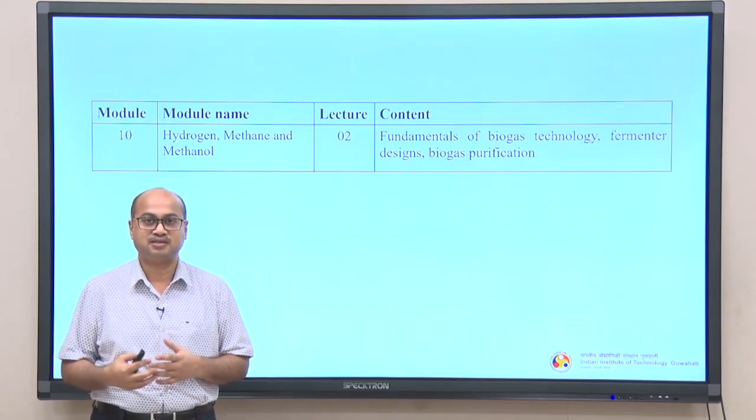Fundamentals of the biogas process. Biogas is an energy rich gas mixture that is created during the natural decomposition of organic material without the presence of air, or precisely, oxygen. The major and important component of biogas is the combustible methane.

Depending on the substrates used, methane content varies between 50% to 65%. In addition, there is also carbon dioxide with a proportion of almost 35 to 50%, the second major component after methane. Apart from carbon dioxide, there are other ingredients present in very minuscule quantity, such as nitrogen, water, oxygen and hydrogen sulphide.

Especially hydrogen sulphide creates a lot of problems, but it is present in low concentrations. However, for certain applications you need to scrub it.

Now, biogas can be converted into electricity, heat, gas or fuel. What remains with the fermentation product is a high quality fertilizer. That means after the gas is produced, whatever is left out is the solid residue, which is actually a good quality fertilizer, very rich in humus forming substances and nutrients.

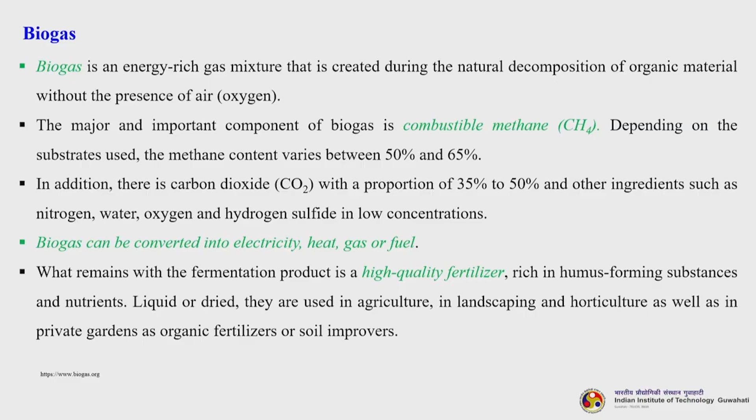Liquid or dried, they are used in agriculture, in landscaping and horticulture, as well as in private gardens as organic fertilizers or soil improvers or soil enhancers.

Natural gas consists of 98% methane. Now, in order to feed biogas into a natural gas network, it must have the same methane content as natural gas, that means 98%. For this purpose, biogas is washed and the carbon dioxide is removed, so that the methane content increases.

Now, if biogas has a methane content of 98%, it is called biomethane. You must have heard about biomethane many times. Many people get confused about the difference between biogas and biomethane. So essentially, if biogas contains 98% methane, we can call it biomethane.

Now this can be fed into the existing gas network, and for example, taken from the pump of a gas filling station. A biomethane vehicle reduces carbon dioxide emissions by up to 90% compared to a comparable petrol engine, and costs the user only half of the fuel cost per kilometer.

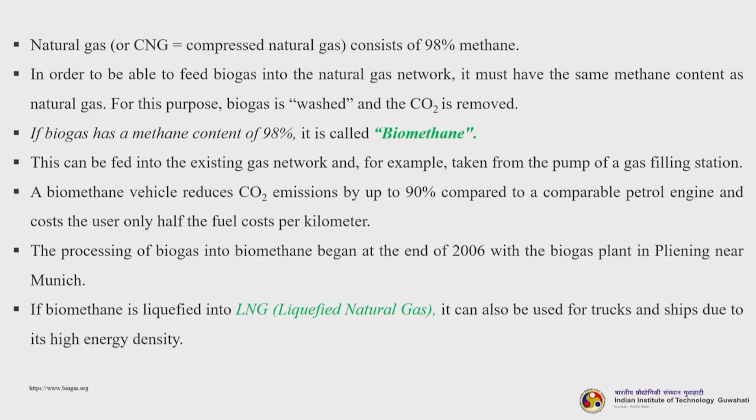The processing of biogas into biomethane began at the end of 2006 with the biogas plant near Munich in Germany. So if biomethane is liquefied into liquefied natural gas, that is LNG, it can also be used for trucks and ships due to its high energy density.

Now we will try to understand the characterization of the substrates, that is, what type of characterization they require, as these are basically the feedstocks for the biogas plants. So the term substrate refers to any biomass suitable as an input material or feedstock for the biogas plants.

Not all the constituents of the substrates are biodegradable in an anaerobic fermenter. Most of the biomass consists of water, and minerals form another fraction of the biomass. So although all organic matter is considered biodegradable, the reaction velocities of degradation of various organic compounds differ considerably.

The substrate may contain easily biodegradable material like sugar, starch, alcohols and so on, then medium biodegradable materials such as protein, cellulose, fats, oils and so on, and then heavily biodegradable materials like lignocellulose and lignin. Both of these decompose very slowly, and sometimes not at all, and therefore the retention time inside the fermenter becomes very long due to the slow decomposition of these components.

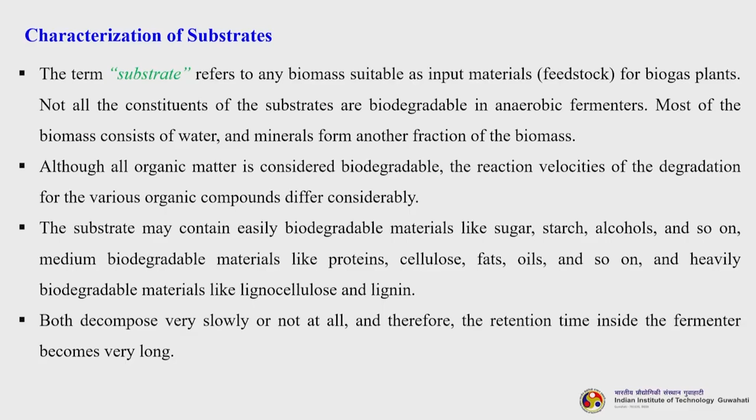How to characterize the composition? First, a defined amount of substrate should be dried at 105 degree centigrade until the mass remains constant. So I am just trying to explain the procedure to characterize the substrates.

Mainly water will be lost, but also some substances such as alcohols, aldehydes, ketones, carboxylic acids, etc., all organic components having low vapor pressure, will disappear. Now this residue is called total solid or dry matter. So you can write either TS, which is more appropriate, or many times people write dry matter also.

After ashing for 6 hours at 550 degrees centigrade, only the minerals will remain. It is assumed that the difference between the mass of the total solid and the mass of the ash, so to speak, the loss on ignition, is the mass of the organic dry matter that was decomposed thermally or burned down. Sometimes this organic dry matter is also called the volatile substances, VS, or volatile dry matter.

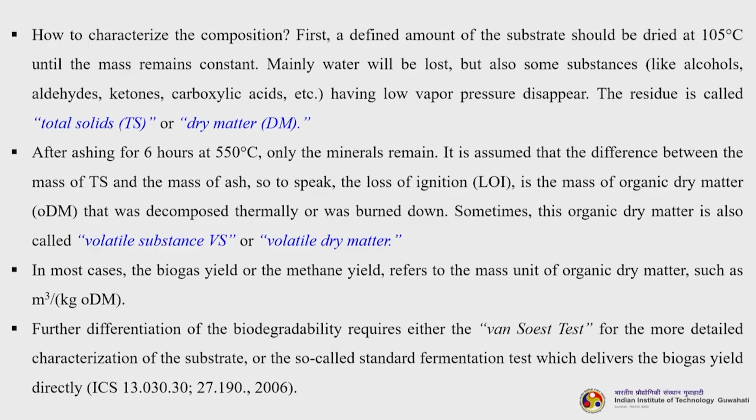In most cases, the biogas yield or methane yield refers to the mass unit of organic dry matter, such as meter cube per kg of ODM, where ODM is organic dry matter. Further differentiation of the biodegradability requires either the Van Soest test for more detailed characterization of the substrate, or the so-called standard fermentation test, which delivers the biogas yield directly.

For the metabolism of the microorganisms, macronutrients like nitrogen, phosphorus, potassium, sulfur, as well as certain micronutrients such as trace elements of chromium, cobalt, selenium, tungsten, magnesium, iron, zinc, nickel, molybdenum and so on are utmost necessary.

A ratio of C to N to P to S of 500 to 1000 is to 15 to 20 is to 5 is to 3 is usually sufficient. The balanced composition can be obtained by adding raw straw if the C to N ratio is too low, or by adding manure if this ratio is too high.

So we are learning how to prepare the feedstock material and charge the fermenter so that anaerobic digestion can proceed. A mixture of trace elements needs to be added only in the case of monofermentation of biogas crops, while in the case of co-fermentation of plants and manure, an addition of trace elements is usually not necessary.

It should be pointed out that high concentrations of nutrients as well as trace elements could have an adverse, even toxic effect on the metabolism of the microorganisms responsible for producing biogas. Despite all progress in research, the role of the trace element has not been discovered completely yet, especially for new substrates. The necessity of adding nutrients and trace elements should be analyzed experimentally.

Now, this is a very interesting slide, for which I have given a reference here—you can download and read it later. In a single schematic representation, the authors have tried to make us understand the different types of characterization processes and at what temperature each will be carried out.

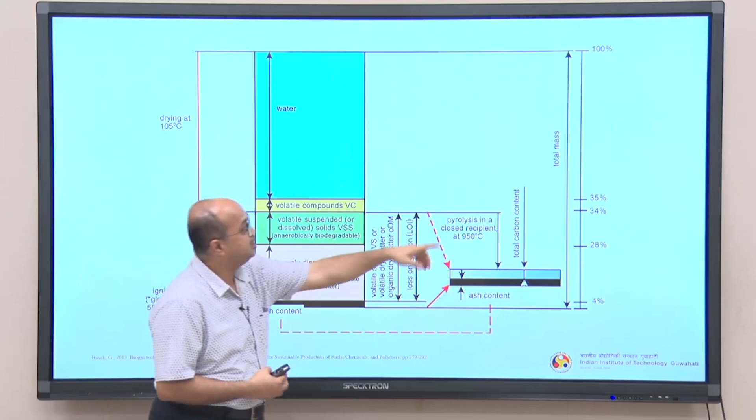If you see this, the temperature is increasing in this direction, and the total mass is 100%, getting decreased in this direction. The most of the portion is almost 34 to 35%—this entire rest here is 35—so the remaining 65% is the water loss, or the moisture loss, due to bound and unbound moisture.

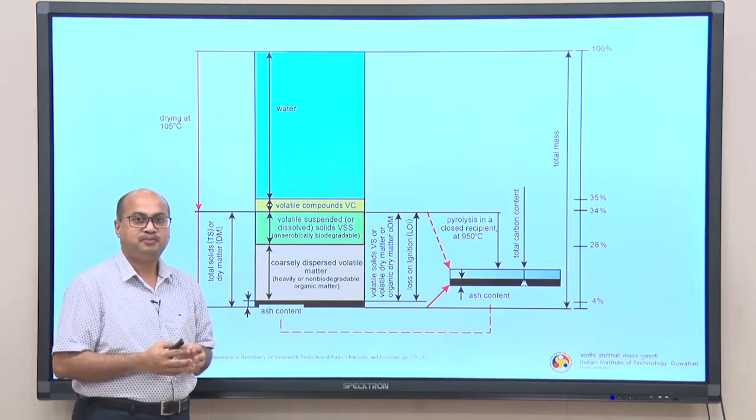Then ash content, which is usually 0 to 4%, depending upon the biomass feedstock. Again, ash content can be determined using pyrolysis in a closed recipient at 950 degrees centigrade. So you can understand, in a single slide, the different characterization techniques that can be done with respect to thermal decomposition.

Now we will try to understand the basic processes and process conditions essential for biogas fermentation. The decomposition of the substrate and the formation of biogas involve at least 4 distinct steps. We will see them one by one.

The first is the decomposition of solid organic matter by extracellular enzymatic reactions into water-soluble chemical compounds. This is called hydrolysis, the most important step of the biogas process. This hydrolysis by fermentative bacteria is the conversion of polymers into monomers and brings about a wide variety of substances like glycerol, sugar, amino acids, alcohol, aldehydes, ketones, esters, higher carboxylic acids and so on.

In the second step, these substances are converted by acidogenic bacteria into carboxylic acids such as propionic acid, butyric acid, acetic acid, valeric acid, caproic acid and so on. Simultaneously, hydrogen and carbon dioxide are produced as byproducts, but at a very low amount.

The third step is that acetogenic bacteria convert the carboxylic acid into acetic acid. In the fourth and final step, methanogenesis, methanogenic bacteria produce biogas from acetic acid as well as from molecular hydrogen and carbon dioxide. The latter conversion seems to be much more important than previously assumed.

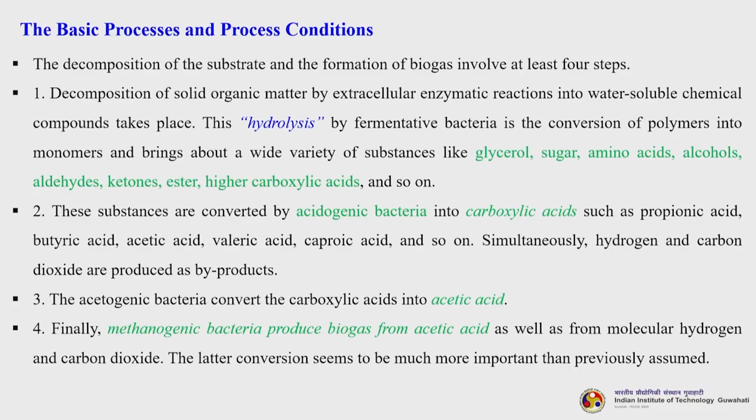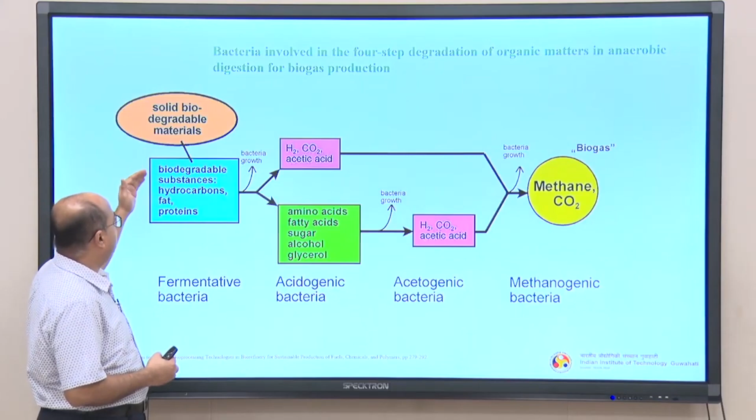This slide shows the different types of bacteria involved in the four distinct steps. We will quickly go through them. The first is the fermentative bacteria. Here, solid biodegradable materials such as hydrocarbons, fat, and proteins are converted to monomers - this is the hydrolysis step.

These steps happen in sequence, but once they start, they are all happening simultaneously. Then we have acidogenic bacteria, which carry out acidogenesis. Here amino acids, fatty acids, sugar, alcohol, and glycerol are converted into different types of acids like carboxylic acids. Also, a little amount of molecular hydrogen, carbon dioxide, and a little acetic acid are formed during this process.

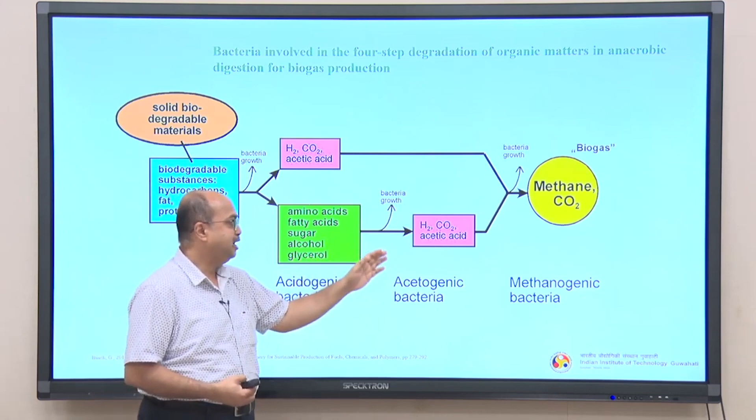Now we go to the methanogenesis process, where methanogenic bacteria convert acetic acid, molecular hydrogen, and carbon dioxide, finally into methane and carbon dioxide. This conversion uses methanogenic bacteria. So you can understand the four distinct classes of bacteria responsible for carrying out four distinct and necessary steps inside the biogas fermenter.

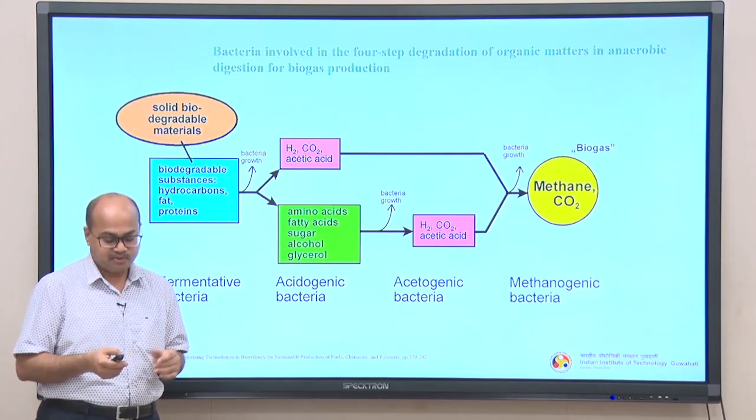All four steps run in parallel at the same time, forming a serious problem for process control. The stability of the process depends on the equilibrium between acid formation, by steps 1 to 3, and acid consumption, by step 4. There should be a balance between these steps where acids are produced and the final step where acid is consumed and converted into methane and carbon dioxide.

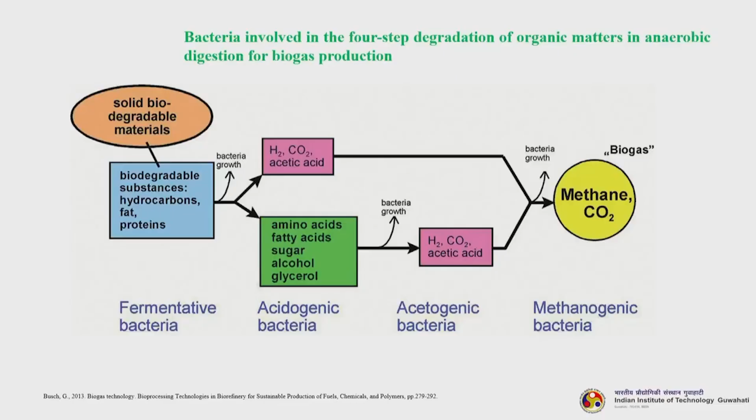Since methanogenic bacteria can only exist in a pH range between approximately 6.8 and 8.2, any overproduction of acids may lower the pH below this limit, thereby killing or at least inhibiting the methanogenesis bacteria, which is not good. Once the pH has fallen below the limit, the collapse of the process cannot be reversed, and the whole content of the fermenter must be disposed of.

The control of the feed rate of substrate is the most important technical measure to keep the process properly running. Hydrolysis, step 1, is the bottleneck of the entire biogas production process. The enzymatic degradation of polymers into monomers determines not only the overall biogas yield but also the process intensity.

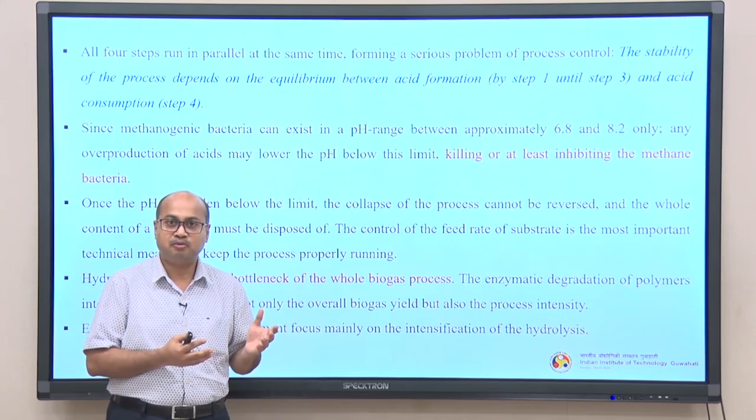The reason hydrolysis is the bottleneck is that this is the step where polymers are degraded into monomers. The more efficiently polymers are degraded into monomers, the more methane will be produced - it's as simple as that. More monomers means more methane. Efforts in research and development focus mainly on intensifying this hydrolysis step.

The necessary microorganisms for all four steps are ubiquitous. The addition of inoculating microbes is not needed, but could shorten the fermentation period. This refers especially to the methanogenic bacteria, which have lower rates of cell division than other bacteria - meaning other acidogenesis bacteria.

A continuous feed of inoculate has not proven successful, because the whole system adapts itself permanently to the process conditions. This refers mainly to steps 1 to 3 of the fermentation process described earlier, as well as to the use of waste as substrate, which carries a wide variety of microbes into the process.

Similar principles from ecological systems apply here - the higher the biodiversity, the more stable the system. So instead of keeping fermenters clean and free from strange microbes, it is better to offer high biodiversity of microorganisms, for example by occasionally adding compost, sewage sludge, or manure.

The microbial variety is controlled primarily by the substrate, and secondly by the process conditions. Microorganisms grow and settle according to environmental conditions, mainly the available nutrients, temperature, and pH value. This refers not only to the input substrates but also significantly to the intermediate substances of the biodegradation process.

Due to the higher number of available species for steps 1 and 2, hydrolysis and acidogenesis, these two steps may run in a wide temperature range, from approximately 20 degrees Celsius to more than 60 degrees Celsius.

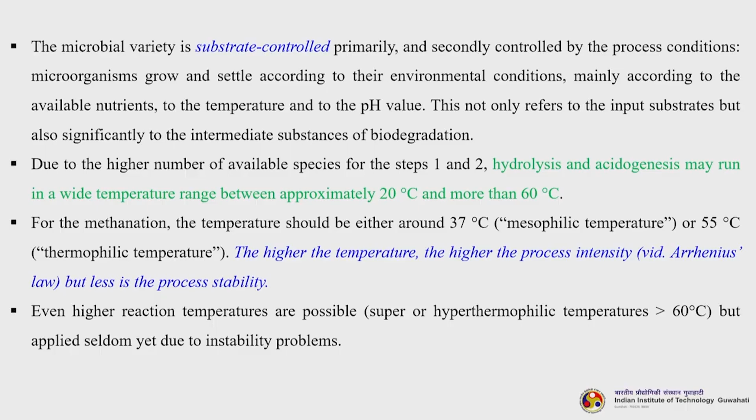The microorganisms, especially the methanogenic bacteria, together with acetogenic and acidogenic bacteria, form a biocenosis, meaning a consortium of bacteria, preferably as biofilms on solid surfaces or as floccules. There is a very intensive transfer of intermediate products between the different microorganisms, called interspecies mass transfer, that greatly affects the process intensity and stability.

The microbes are embedded in extracellular polymeric substances, popularly known as EPS. They are composed of polysaccharides, proteins, nucleic acids, lipids and other biological macromolecules. EPS provide a highly hydrated gel matrix in which the microbes can establish stable synergistic consortia.

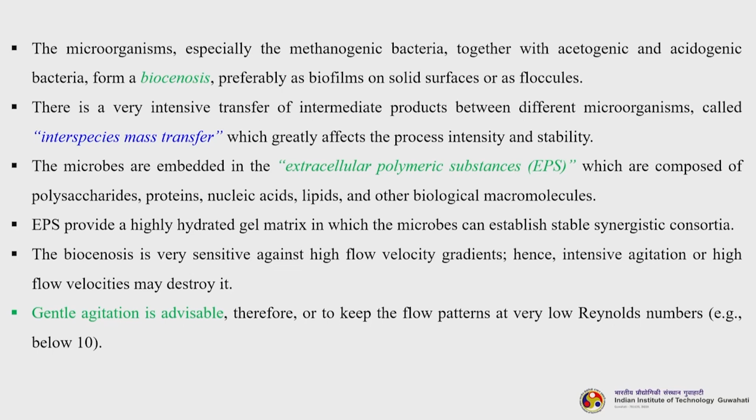The biocenosis is very sensitive to high flow velocity gradients, hence intensive agitation or high flow velocities may destroy it and must be avoided. Gentle agitation is advisable because some form of agitation enhances the rate of mass transfer, so the flow patterns should be kept at very low Reynolds number, almost below 10.

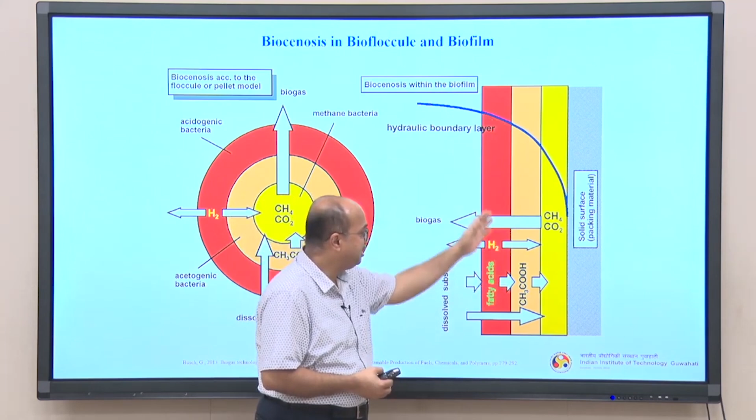Similarly, for the film type of growth over a solid surface, methanogenic bacteria are present immediately on the surface of the host, or solid surface. Above that is acetogenic bacteria, and finally acidogenic bacteria, which is exposed to the bulk, or the feed.

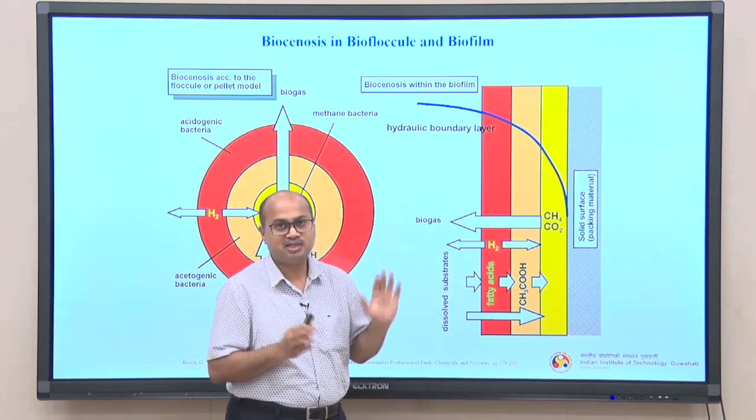More or less, the film is represented in a similar way, distinct but not clearly separable - you cannot cut them apart and take the acidogenic bacteria separately from the methanogenic bacteria. These are schematic representations; in reality they exist in a very beautiful way, either in floccules or film development, with entirely synergistic relationships between all of them.

Let us look at the intermediate products, the fatty acids being formed here. This is the step where polymers are converted to monomers. Apart from that, small amounts of acetic acid, molecular hydrogen and carbon dioxide are also formed, and all of these are transported in this direction.

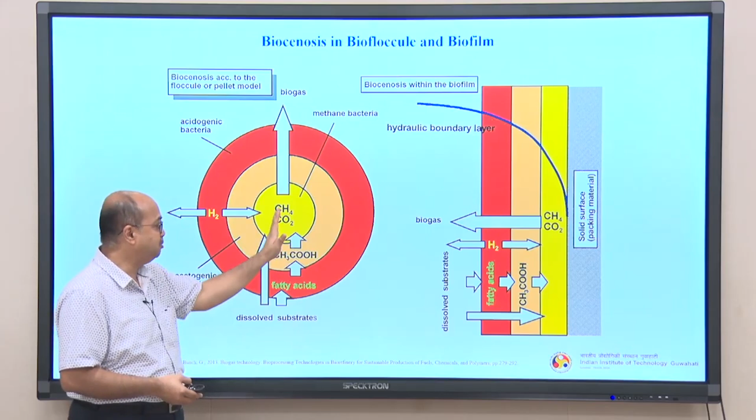Here, the acidogenic bacteria convert all these monomers into different acids. These acids are the source for the methanogenic bacteria, and this mass transfer is happening in this direction, while mass transfer is also happening in this other direction.

So what is happening is, as I was telling, these acids are the source or substrates for the methanogenic bacteria, which eventually convert them into methane and carbon dioxide. That happens in the final core, and then methane and carbon dioxide come out.

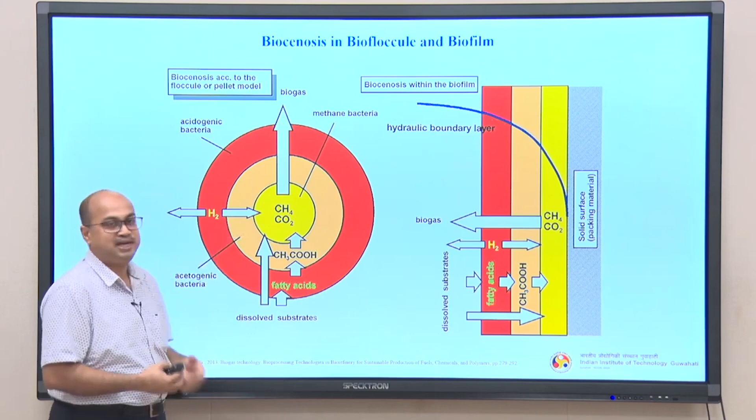Now we will try to understand the process disturbances. It is very important because operating the plant, though it looks simple, is not so simple. We need to take care of many things. We will try to understand what creates disturbances and how to address them.

It is said among experts, though not published officially, that the overall availability of biogas plants in Europe amounts to only 50 to 60% with respect to the design capacity. Apart from combined heat and power plant failures, major reasons include the following: the first is too fast an increase of the feeding rate.

After commissioning of a biogas plant, due to the limited growth rate of methanogenic bacteria, the necessary adaptation of the microorganisms, and the time needed to establish the biocenosis, too fast an increase of feeding rates will not solve any purpose.

Why? Organic acids might be produced faster than they are consumed. This is what we do not want, because it will inhibit the entire process. As a result, pH value falls rapidly and inhibits or even kills the methanogenic bacteria, which are very sensitive.

The recommendation is that feeding should be increased stepwise under permanent monitoring of the pH. So a fed batch system is always a better system. Be patient, bioprocesses need space and time, do not be in a hurry. It may take two years until a new process runs at its optimum, so you need to be very patient.

The growing rate of the microorganism determines the hydraulic retention time, at least in single stage reactors. If the volumetric feed rate is too high, microorganisms will be washed out unless they are fixed. In practice, the retention time should not fall below 12 days minimum retention time.

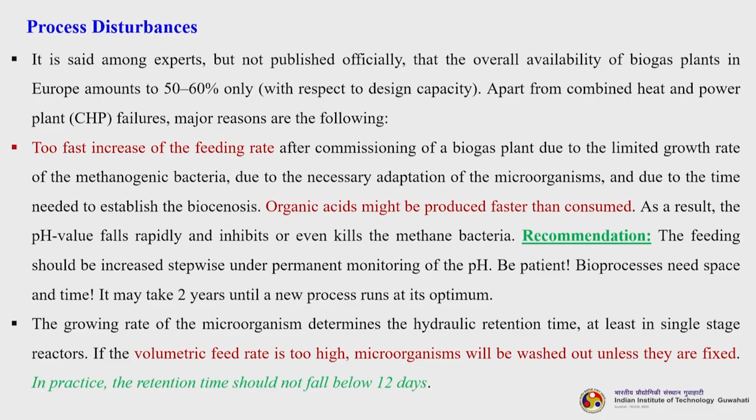Some substrates like proteins, especially from slaughter waste, food waste, expired food, blood, etc., legumes, and some types of manure like chicken manure may contain high concentrations of nitrogen, which is converted into ammonia or ammonium depending on process conditions. Ammonia leads to an inhibition of methane bacteria, so I am telling you again, methanogenesis bacteria are extremely sensitive to environmental conditions.

We have to be very careful. The limit concentration depends on pH and temperature, and is approximately 3000 ppm under mesophilic conditions at pH 7.

Heavy metals act as trace elements at lower concentrations and stimulate bacterial activity, but may have a toxic effect at higher concentrations. Any such metals beyond a certain limit are always toxic, same for us human beings. Usually the concentrations of such metals will not rise fast.

Hydrogen sulfide, a byproduct of the fermentation process, chemically binds and precipitates some metals. Other metals can be removed by complexing agents, for example polyphosphates, and lose their bioavailability. On the other hand, missing trace elements reduce biogas production, which is also an issue and they need to be added if the analysis of the fermenter inventory indicates scarcity.

You need to keep monitoring every day, even on an hourly basis, to find out the heavy metal concentrations. Then you will find out whether you need to supply them or they are already present in sufficient amount.

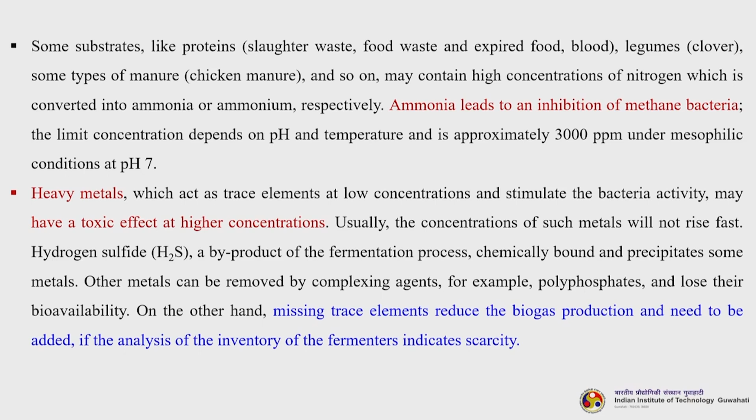Most hydrolysis and acidifying bacteria are facultative anaerobic. Strong anaerobic conditions are not necessary for them, but methanogenic bacteria are obligatory anaerobes, and inhibition starts at a low concentration of 0.1 ppm oxygen. So it is very low, you can understand how sensitive these methanogenic bacteria are.

Recently it was found that methanogenics could even adapt to a higher oxygen concentration of more than 1% without being inhibited. Nevertheless, strong anaerobic conditions should be maintained inside the fermenter at all times.

Bio waste as well as industrial biodegradable waste could contain high concentrations of sulfur. Hydrogen sulfide could be created during hydrolysis and acidification as well as during methanation.

Inhibition of the methanation process begins at a concentration of approximately 50 ppm in case of undissociated hydrogen sulfide at a pH greater than 6.8. Dissociated hydrogen sulfide causes inhibition of the process at concentrations of 200 ppm and above.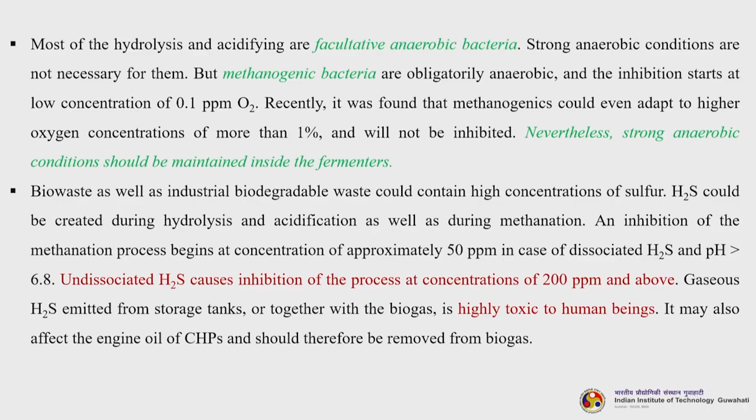Gaseous hydrogen sulfide emitted from storage tanks, or together with the biogas, is highly toxic to human beings, which is another problem. It may also affect the engine oil of the CHPs, and should therefore be removed from the biogas process plants. So now we will talk about different types of fermenter designs for biogas production.

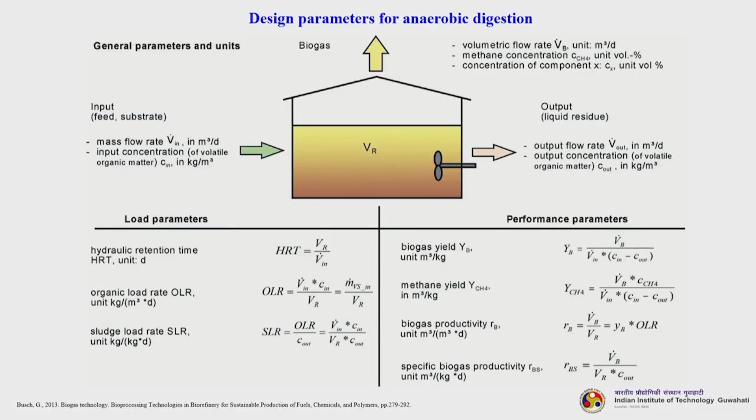The fermenter design is based on some fundamental parameters and equations as illustrated in the figure. I will show the figure, then we will come back. These are the design parameters for anaerobic digestion. Let me explain quickly: there are three things. First is the input, the feed or substrate; the output is the liquid residue; and then there is the biogas, which is the final product output.

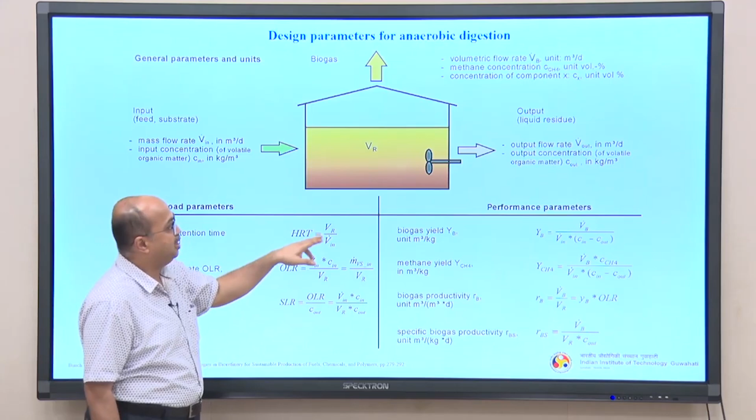You can see the load parameters given here and the performance parameters given here. The load parameters include hydraulic retention time, HRT, in terms of days, which is VR by Vin, where Vin is your input mass flow rate and VR is your reactor volume. Then there's organic load rate OLR and sludge load rate SLR.

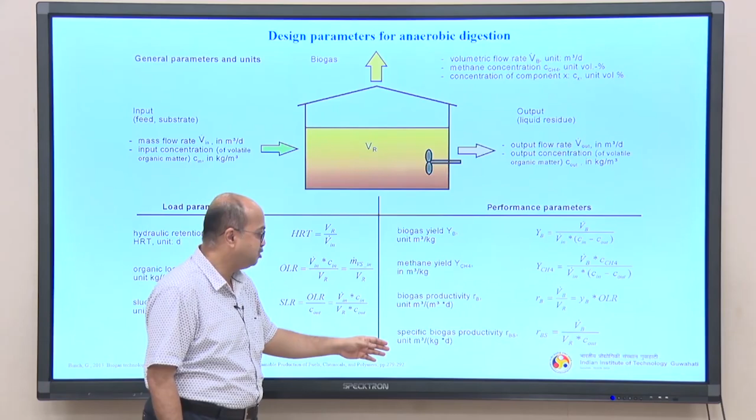Sludge is also required, but in very minute quantity depending upon the capacity and the condition. Performance parameters are biogas yield, methane yield, biogas productivity and specific gas productivity, unit in meter cube per kg per day. These equations are valid only for steady state operation.

Load parameters describe the physical load of the reactors. The simplest is the hydraulic retention time. It describes the statistical average residence time of a defined amount of matter inside the reactor, which has a defined volume, when a certain volumetric flow rate flows through the reactor.

Then the next is OLR, organic load rate. It is the mass of the dry organic matter, or volatile matter, fed to the reactor per unit of time and per unit volume of the reactor. It is one of the most important parameters to describe the capacity of a fermenter.

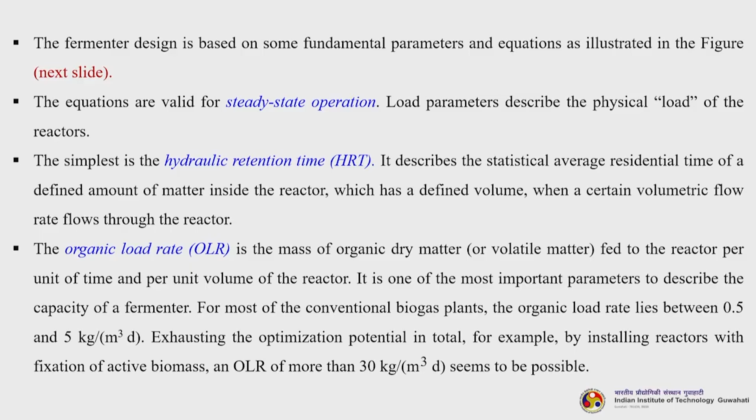For most conventional biogas plants, the organic load rate lies between 0.5 and 5 kilograms per meter cube per day. Exhausting the optimization potential in total, for example by installing reactors with fixation of active biomass, an OLR of more than 30 kg per meter cube day seems to be possible. It is actually recommended.

The most important performance parameter is of course the biogas or methane yield. It is the ratio of the total biogas produced with respect to the converted organic dry matter. The biogas productivity explains how much biogas is produced by unit volume of the reactor per unit amount of time.

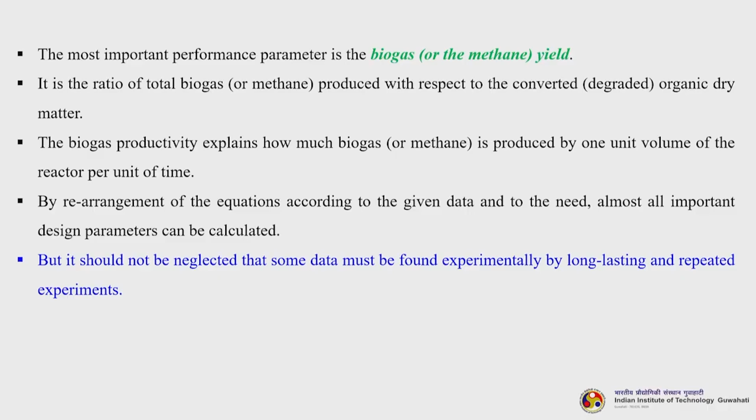By rearrangement of the equations according to the given data and the need, almost all important design parameters can be calculated. But it should not be neglected that some data must be found experimentally through long-lasting and repeated experiments, so that they become more reliable data.

The desired biogas digester should meet the following specifications: absence of water or gas leakages, operating temperature of 35 degrees centigrade, which is the mesophilic condition for the methanogenesis bacteria, high corrosion resistance, easy to maintain, and low cost and affordable. The biogas digester was designed to withstand pressure subjected during operation.

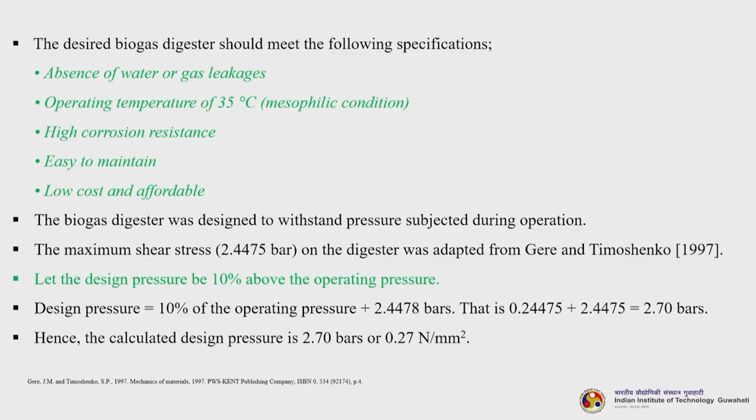The maximum shear stress on the digester was adapted from a classic work by Gere and Timoshenko, the reference is given below. Let the design pressure be 10% above the operating pressure, as recommended by designers. So design pressure equals 10% of the operating pressure plus 2.4478 bars, which is the maximum shear stress, giving about 2.7 bars. Hence the calculated design pressure is 2.7 bars, or 0.27 Newton per mm square.

Now we will quickly discuss a few digesters which are commercially adapted, used and installed in many places. First is the plug flow digester. This is a type of anaerobic digester that uses a long narrow horizontal tank in which material or manure is added at a constant rate, which forces other material to move through the tank and be digested, with no mechanical or any form of agitation inside.

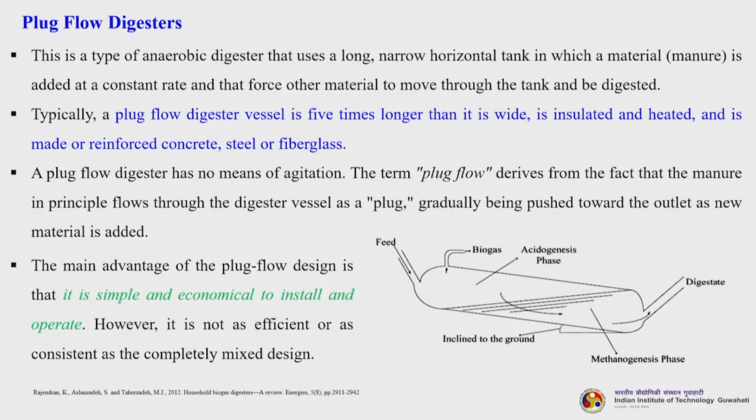Typically, a plug flow digester vessel is 5 times longer than it is wide. It is insulated and heated, and made of reinforced concrete, steel or fiberglass. A plug flow digester has no means of agitation. The term plug flow means the manure in principle flows through the digester vessel literally as a plug, gradually being pushed out to the outlet as new material is added. The main advantage of the plug flow design is that it is simple and economical to install and operate. However, it is not as efficient or as consistent as completely mixed fermenters.

The next one is fixed dome digesters. A well and a dome are made out of cement concrete. Fixed dome digesters are usually built underground. The dome is fixed, hence the name fixed dome type of biogas plant. The function of the modified fixed dome digester plant is similar to that of the floating holder type biogas plant. The only difference is the top part of the digester.

You can see here this portion is fixed, it is not floating. I will show you one floating one in the next slide. The slurry expands and overflows into the overflow tank. Now, the disadvantage is that special sealants are required for this type of fixed dome digester. High technical skills are required for construction, and gas pressure fluctuates, causing complications in gas use, because gas is continuously being generated. In the case of the fixed dome, as gases are continuously generated, you should have a proper head space to hold the gas.

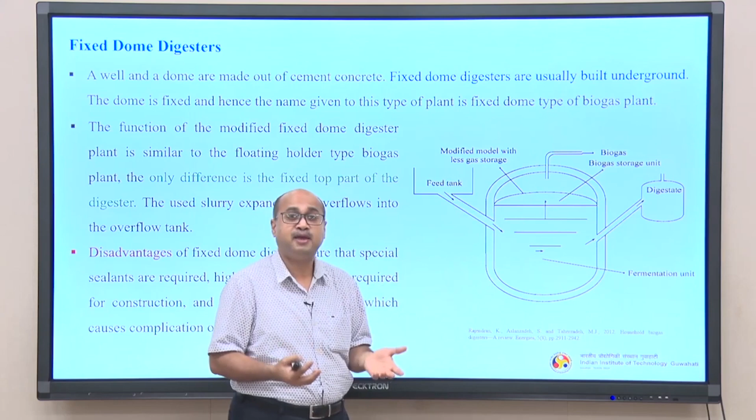Now, even if you have a proper head space, when the gas is continuously formed and getting concentrated, it will create too much pressure inside the tank. If it is not continuously removed at a particular flow rate, thereby maintaining the pressure inside the fermenter, the fermenter may get cracked or burst. So these are the disadvantages of the fixed dome process.

Now, to overcome that, we have the floating drum digester. This is a classic design, done by Jashu Bhai J Patel in India in 1956. He designed a floating drum biogas plant, popularly known as the Gobar gas plant in India. In 1962, Patel's design was approved by the Khadi and Village Industries Commission of the Government of India, popularly known as the Khadi Commission, and this design soon became popular in India and the entire world.

It is divided into two parts. One side has the inlet from where the slurry is fed to the tank. The tank has a cylindrical dome made up of stainless steel that floats on the slurry and collects the gas that is generated. This is a beautiful design.

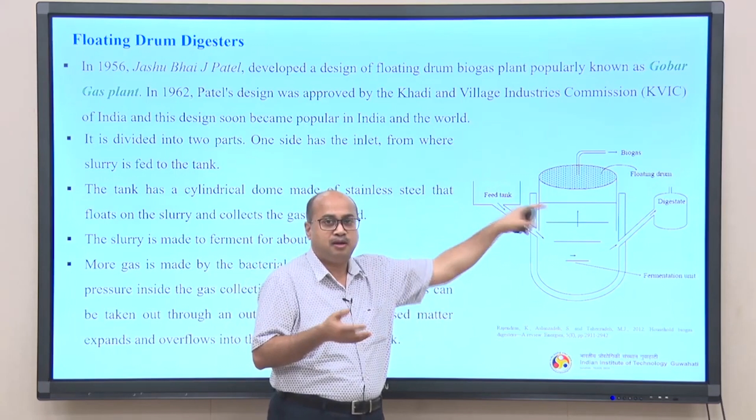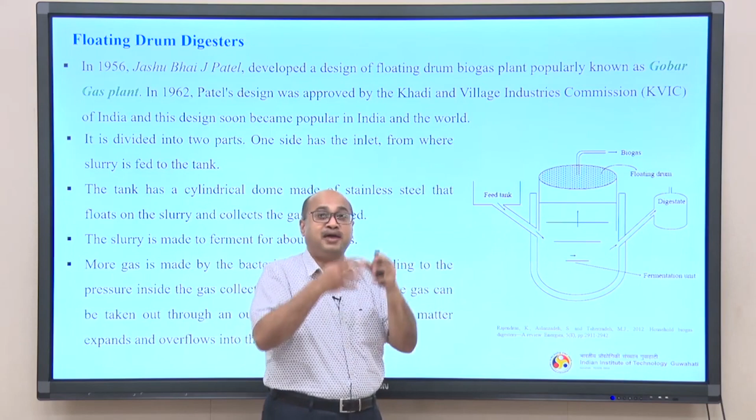What is happening here is that the top portion is floating. So as and when the gas is getting formed and the amount of gas increases, the drum, the top portion which is floating, will move upward. Depending upon the amount of gas generated as well as the pressure developed, the head will float, moving up and down like this. It is a beautiful design.

The slurry is made to ferment for about 50 days. More gas is made by bacterial fermentation, leading to the pressure inside the gas collecting dome increasing. Now, the gas can be taken out through an outlet pipe. The decomposed material expands and overflows into the next small holding tank.

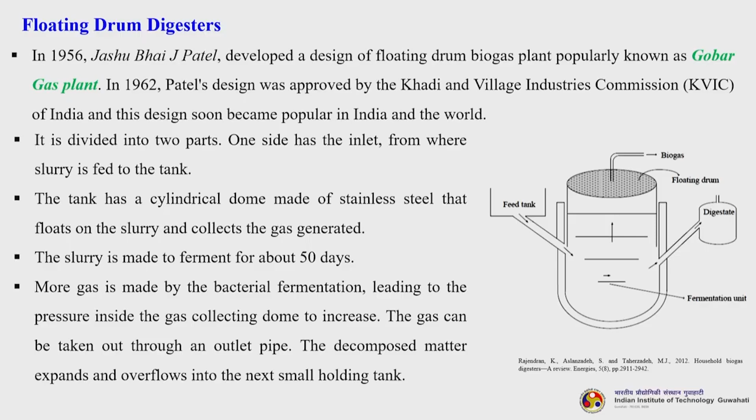Now we will talk about biogas purification. As I told you earlier, biogas consists of many different components, starting from the major component methane, to carbon dioxide, carbon monoxide, nitrogen, hydrogen, hydrogen sulfide and other compounds. You need to purify them for a particular application. Suppose I am preparing biomethane, then I have to scrape off all the carbon dioxide and everything else, so that I have at least 98% enriched biogas, which I can then call biomethane, which can be directly used in vehicles.

Let us try to understand how it can be done. In order to obtain biogas in a productive and profitable way, it must be processed before use. Prior to use, raw biogas is subjected to conditioning, or purification operations, resulting in the properties required by the users. Biogas purification is the operation of retention of unwanted biogas components before it is used in the combustion process. Whatever the ultimate way of using biogas, it is impossible to use it in the raw state. The only usable component is methane.

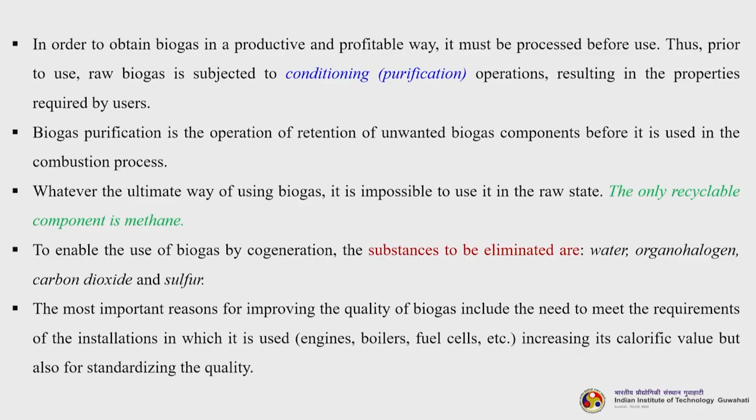To enable the use of biogas by cogeneration, the substances to be eliminated are water, organohalogens, carbon dioxide and sulfur. The most important reasons for improving the quality of biogas include meeting the requirements of the installations in which it is used, such as engines, boilers, and fuel cells, as well as increasing its calorific value and standardizing the quality. During the conditioning process, the compounds that inhibit combustion are reduced in quantity or totally eliminated, depending on the final use of biogas.

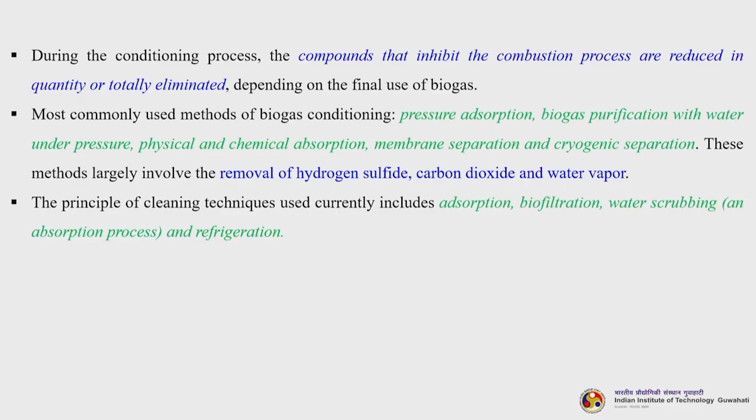The most commonly used methods of biogas conditioning are pressure adsorption, biogas purification with water under pressure, physical and chemical absorption, membrane separation, and cryogenic separation. We will discuss one or two specific and most widely used applications. These methods largely involve the removal of hydrogen sulfide, carbon dioxide and water vapor. The principle cleaning techniques currently used include adsorption, biofiltration, water scrubbing, which is an absorption process, and refrigeration. We will discuss these.

The following table highlights the biogas components that are removed depending on how they are being used. The major components listed here are hydrogen sulfide, carbon dioxide and water. For biogas used in gas stations, hydrogen sulfide must be less than 1000 ppm, carbon dioxide removal is not required, and water removal is not required.

Let us talk about the stove, cooking gas. Hydrogen sulfide removal has to be complete, carbon dioxide removal is not essential, but water has to be removed, otherwise ignition will not proceed.

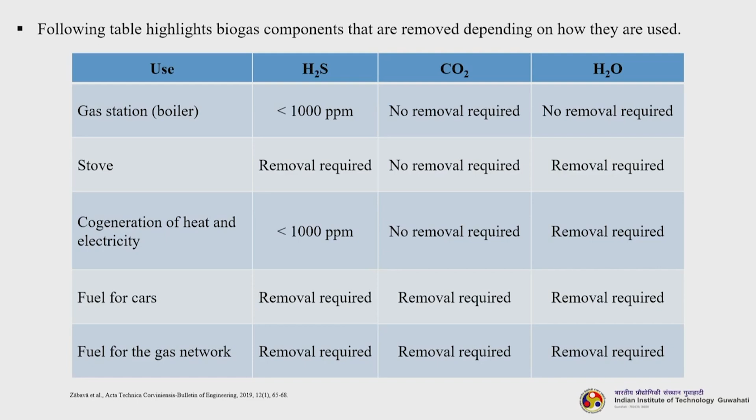If biogas is being used in cogeneration of heat and electricity in CHP plants, hydrogen sulfide must be less than 1000 ppm, carbon dioxide need not be removed, whereas water has to be removed, as it will create problems in combustion. If you are going to use it as fuel for cars, everything needs to be removed, whether hydrogen sulfide, carbon dioxide or water. And if biogas is used as fuel for the gas network, then again everything needs to be removed, whether hydrogen sulfide, carbon dioxide or water.

So we will quickly discuss a few cleaning processes. First is biofiltration. Biofiltration relies upon the natural biological metabolism of sulfur oxidizing bacteria species to convert hydrogen sulfide into elemental sulfur or sulphate. These systems are designed to ensure a high density microbial community and maximize contact between the microorganisms and the feed gas. A biological filter combines water scrubbing and biological desulfurization.

As with water scrubbing, the biogas and the separated digestate meet in a countercurrent flow in a filter bed. The biogas is mixed with 4 to 6% air before entry into the filter bed. Biofiltration systems can be set up in 3 different configurations: bioscrubber, biofilter, and biotrickling filter. In a bioscrubber, pollutants are absorbed into liquid flowing countercurrently through an absorption column, similar to a water scrubber. The liquid is then sent to a bioreactor for the microbes to degrade the contaminants.

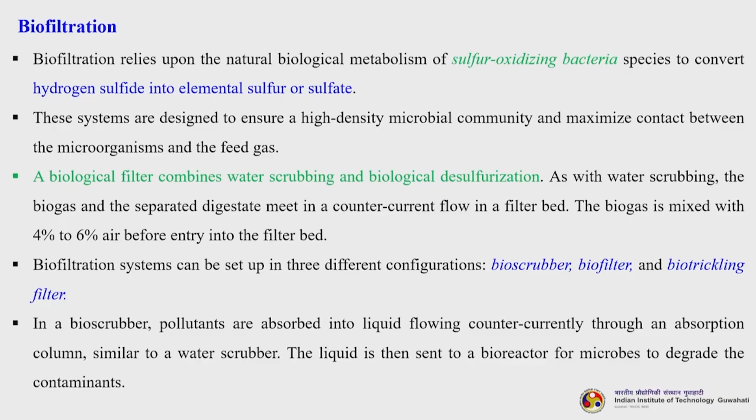A biofilter consists of a packed bed of organic material that stimulates biofilm growth, through which humidified biogas is pumped. Contaminants in the biogas adsorb into the film and interact with the microbes, and eventually they degrade it.

Biofiltration systems are effective for treating low and high hydrogen sulfide concentrations, from almost 50 to 100 ppm up to 2000 to 4000 ppm, resulting in hydrogen sulfide removal of 89 to 99.9% at a rate of 20 to 125 grams hydrogen sulfide per meter cube per hour, which is excellent. Most bacteria grow and function optimally at a temperature of about 35 degrees centigrade and a neutral pH, so these process conditions need to be maintained.

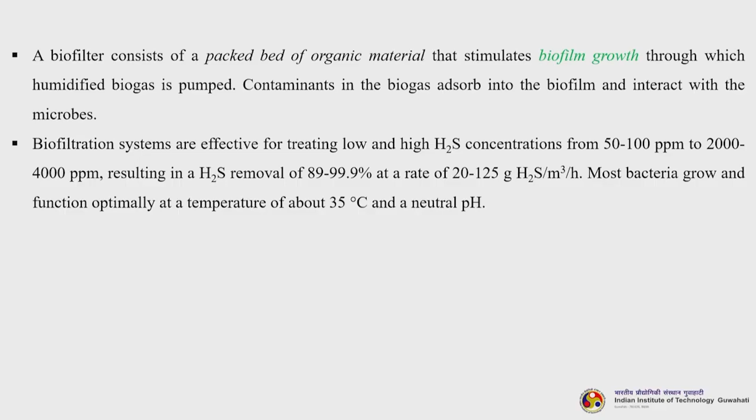Next is adsorption. Adsorption is the adhesion of compounds onto a solid surface. When biogas is flushed through an adsorbent bed, contaminant molecules bind to the adsorbent surface, removing the contaminants from the gas stream. Effective adsorbents are generally highly porous with a high surface area, which greatly increases their removal capacity.

Pressure swing adsorption is a method for the separation of carbon dioxide from methane by adsorption-desorption of carbon dioxide on zeolites or activated carbon at alternating pressure levels. Commonly used adsorbents are zeolite, carbon molecular sieve, silica gel and activated carbon, due to their low cost, large specific area and pore volume, and excellent thermal stability.

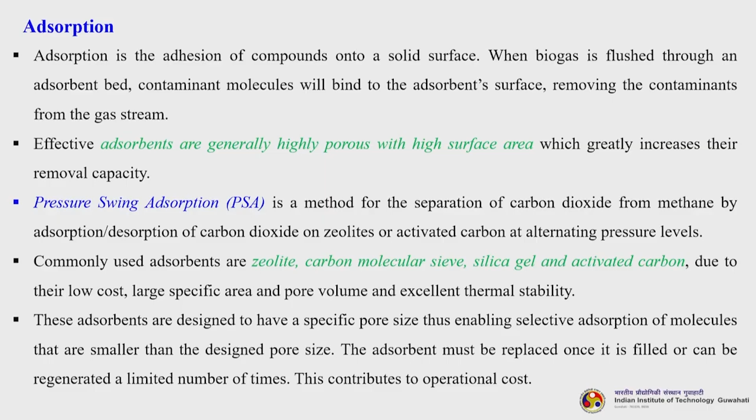These adsorbents are designed to have a specific pore size, enabling selective adsorption of molecules smaller than the designed pore size. The adsorbent must be replaced once it is filled, or can be regenerated a limited number of times. This, however, contributes to extra operational cost.

Recent research and experimental demonstrations have shown that adsorption technology paves the way for scaling up the biogas upgrading process with high energy efficiencies. Moreover, PSA systems can be deployed in any part of the world, since they do not depend on the availability of cold or hot sources.

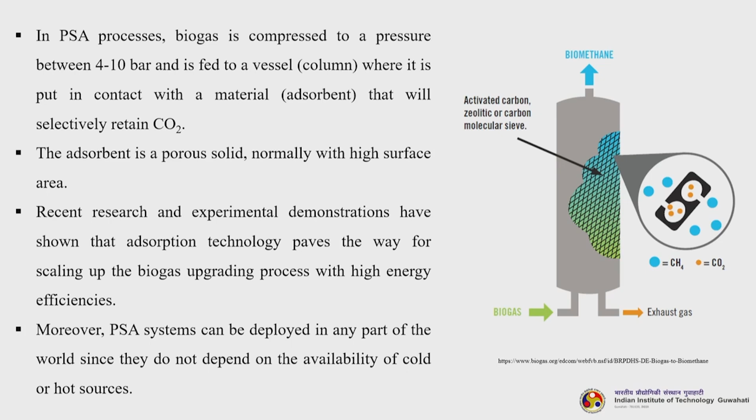Next is pressurized water scrubbing. Purification of biogas by pressurized water is one of the most widely used biogas treatment methods. Pollutant compounds can be physically adsorbed or dissolved in a liquid solution. To enhance the absorption of carbon dioxide and hydrogen sulfide, biogas is usually compressed to 900 to 1200 kilopascal, and a high surface area packing media is usually used.

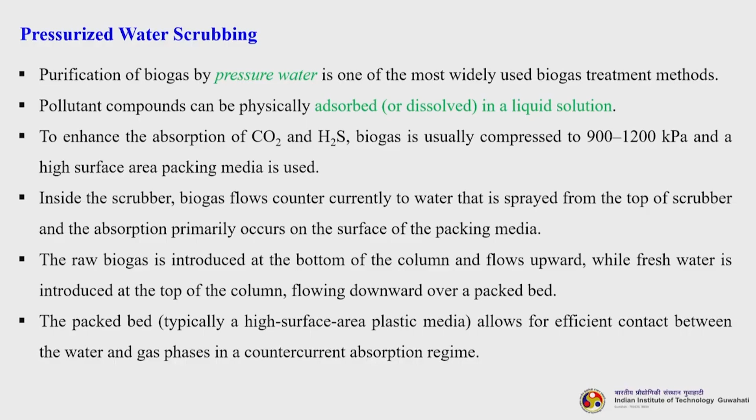Inside the scrubber, biogas flows countercurrently to water that is sprayed from the top of the scrubber, and absorption primarily occurs on the surface of the packing media. The raw biogas is introduced at the bottom of the column and flows upward, while fresh water is introduced at the top of the column, flowing downward over a packed bed. The packed bed, typically a high surface area plastic media, allows for efficient contact between the water and gas phases in a countercurrent absorption regime.

So, this is the process flow diagram of a high pressure water scrubbing. You can see two columns, one is the absorption column, one is the desorption column.

Here the raw biogas is compressed and fed to the absorption column, then in between there is a flash tower. So, upgraded biomethane you will get here.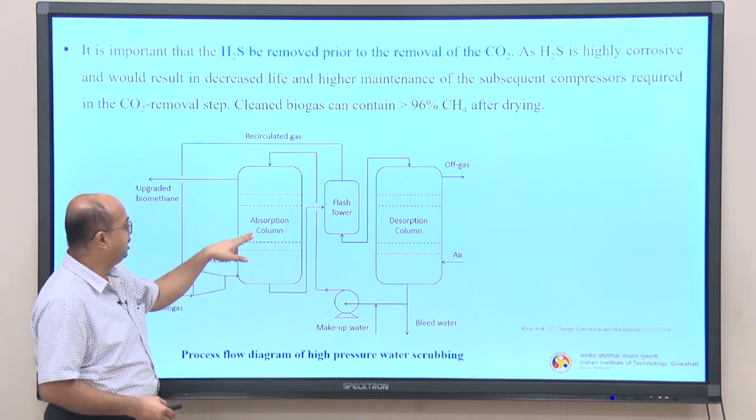When you go for the desorption column, air will be utilized to do the desorption, and whatever is coming, the bleed water and makeup water is added, and it is pressurized and fed to the absorption tower.

It is important that hydrogen sulfide be removed prior to the removal of carbon dioxide, as hydrogen sulfide is highly corrosive and would result in decreased life and higher maintenance of the subsequent compressors. So, it is required that before carbon dioxide is removed, hydrogen sulfide must be removed.

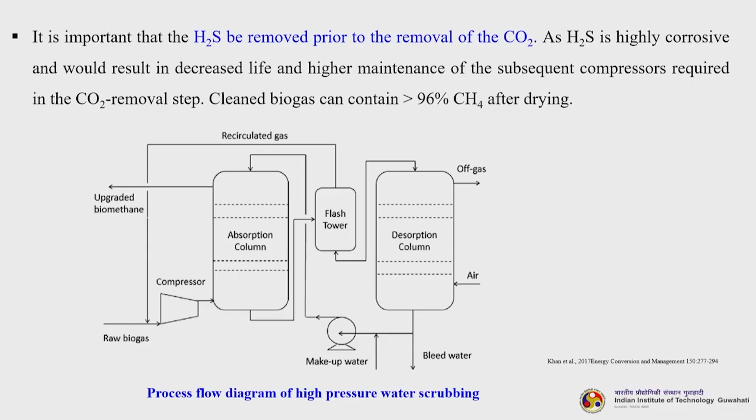Cleaned biogas can contain almost greater than 96% of methane after drying.

So, the next one is refrigeration and chilling. Refrigeration or gas cooling provides a simple means for removing moisture from the gas. When the gas is cooled typically to between minus 18 to 2 degrees centigrade, water vapor condenses on the cooling coils and can be captured in a trap.

Some ammonia will also be removed given the high solubility of ammonia in water. Insignificant trace amounts of other compounds may also be absorbed into the water. At lower temperatures of less than minus 73 degrees centigrade, volatile organic components will condense and can be removed too. At minus 70 degrees centigrade, 99% removal of siloxane can be achieved as well, but it is costly to operate at such low temperature.

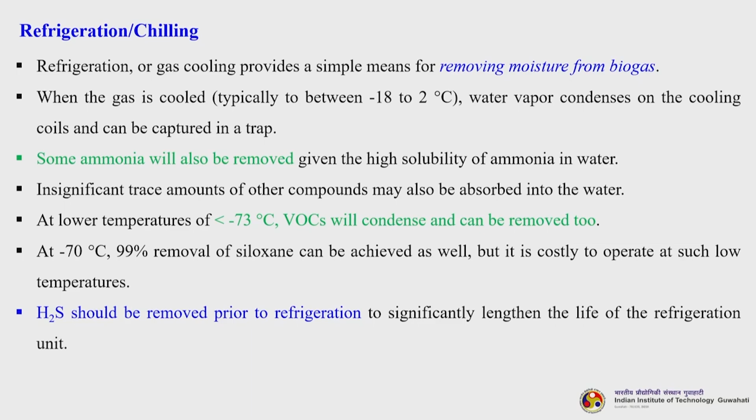Hydrogen sulfide should be removed prior to refrigeration to significantly lengthen the life of the refrigeration unit. So, you must understand that before every final polishing cleaning step, hydrogen sulfide must be removed. It is the most notorious component present in the biogas.

So, these are the contaminants that are removed by different biogas cleaning technologies. It is just a comparative understanding.

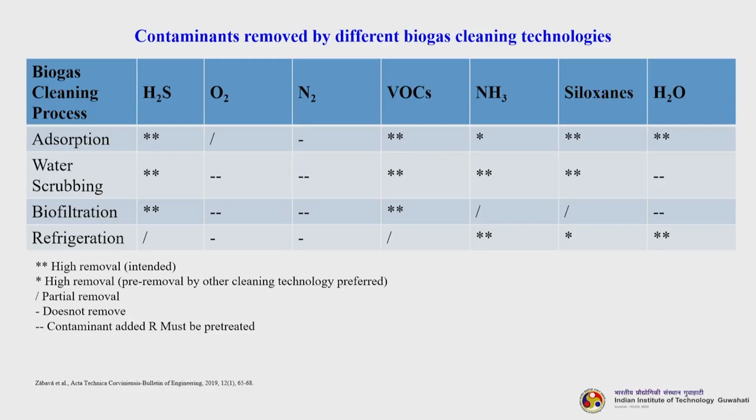Look at adsorption. Hydrogen sulfide, VOCs, ammonia, siloxanes and water all will be removed, so high removal. If you talk about water scrubbing, again hydrogen sulfide, VOCs, ammonia, siloxane will be highly removed. And this one, if you talk about biofiltration, the same thing, and in refrigeration also ammonia, siloxane and water will be removed completely, while other components will be removed partially.

Before I wind up, I would like to mention that each renewable source of energy, whether it is wind, biomass, solar or any such thing, has its specific strength and carries out different tasks. This is the only way to ensure a stable and efficient power supply from renewable energies in the long term, in a sustainable and economical way.

Though wind and solar are available in plenty without us paying for them, they are not always available. In the future, technologies must be developed that provide solutions when wind is not blowing and the sun is not shining. We have to take care of all these things.

Now, this is where biogas comes into picture. Biogas can be reliably and continuously generated and stored. Biogas plants are therefore perfect gap fillers in the renewable energy transition system. A power supply that combines climatic protection with reliability and low costs can only be achieved in the long term if the various renewable energies interact.

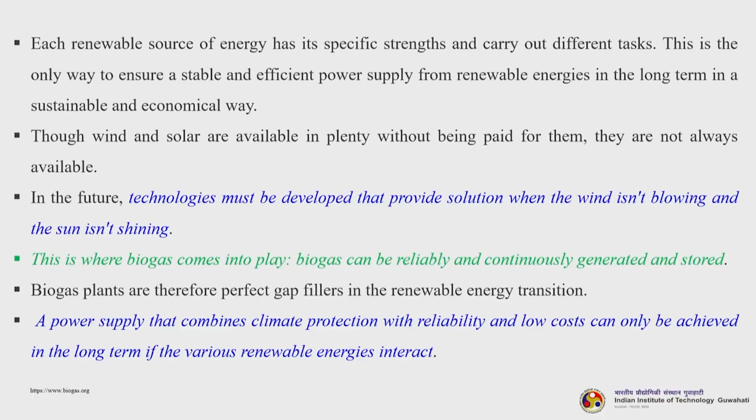Having said that, I wish to mention that we have discussed different types of renewable sources, though our focus is on biomass in the beginning lectures. You must understand that a single source of renewable energy is not sufficient. So, we should have multiple sources of energy wherever possible, solar plus biomass, wind plus biomass, solar plus wind, something like that.

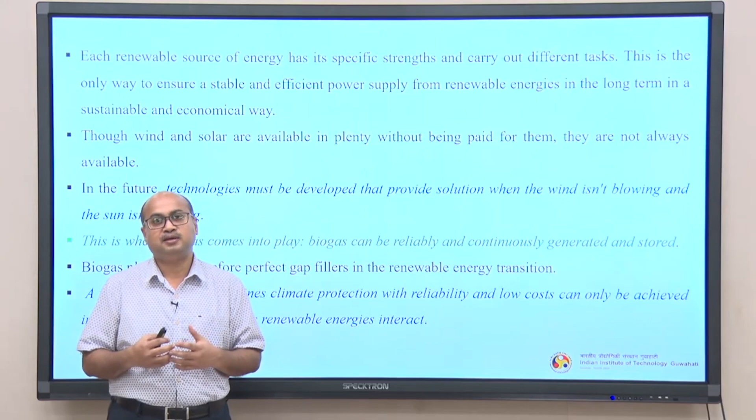There are other sources also, I am just telling the major three sources. They need to be integrated in such a way that generation of power, electricity, everything that is possible from multiple sources occurs without any hindrance, so that there is no shortage of power supply. This is now being practiced in many European countries, and slowly other developing countries have also adopted this model, and things are moving in the right direction.